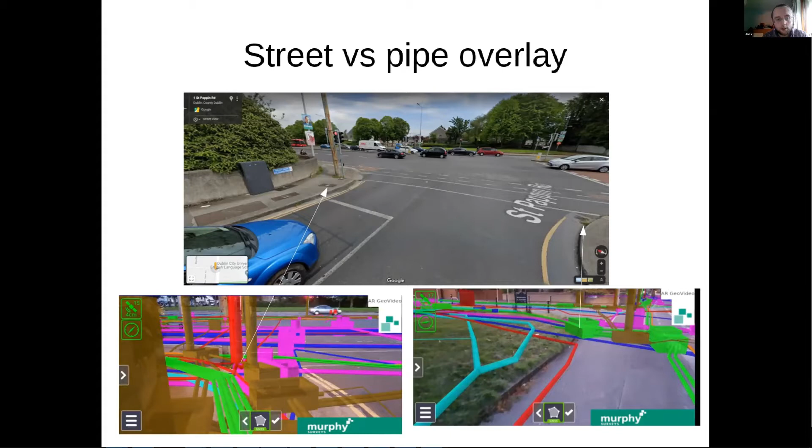So as we can see here, the street is on top, but actually the underground utilities themselves are very densely packed into both footpaths and running along the road. So the solution is to have an augmented reality video display side by side with a map.

GPS points on a map correspond to intervals in the video, and clicking a point on the map displays the appropriate section of the video.

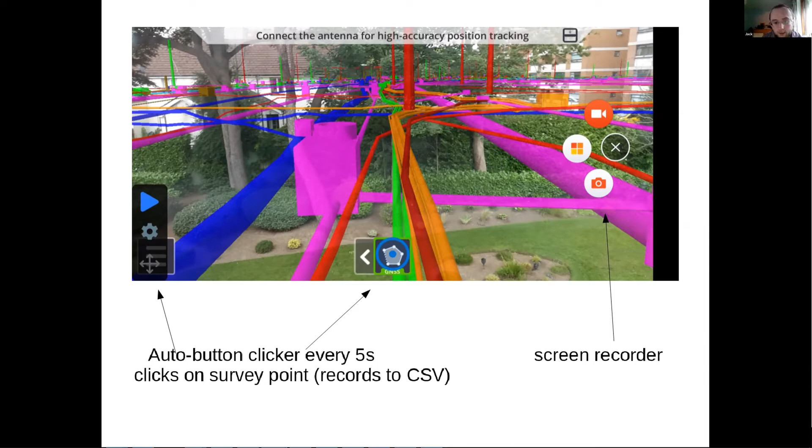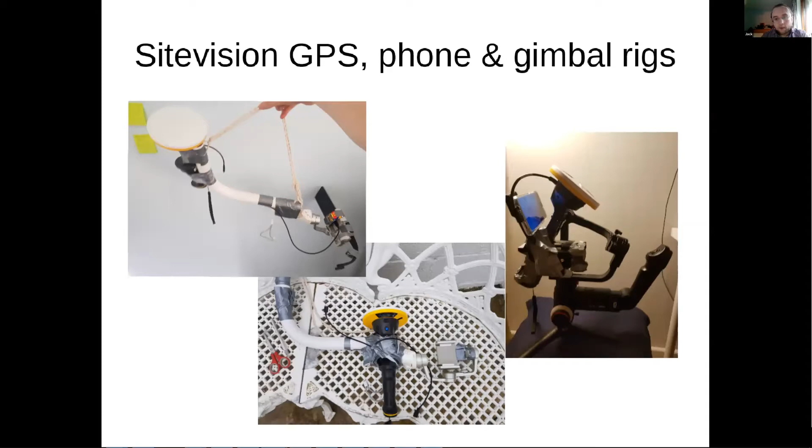This was done with the Trimble Sitevision taped into a massive camera industry gimbal, a screen recorder on the phone, and also an auto-clicker app that would automatically take a survey point every 5 seconds. We went through a couple of iterations of filming rigs, gradually eventually going with the massive gimbal for the third iteration.

There's a live video page as well, which I'll show at the end. As we can see, on the left is the map with the surveyed points, and on the right, the appropriate section of the video.

So what was achieved over the course of the last 2 weeks - the MVP, I guess you'd call it, is done. Everything from the surveying rig to the actual map and video with the appropriate correlation between the two. What is still to be done is to upgrade to a 360 panoramic video.

Unfortunately that night it was too dark to film the 360 video by the time the regular filming was done, and also just an animated marker is needed. And of course, to make it presentable to the client, it needs a lot of styling on the page as well.

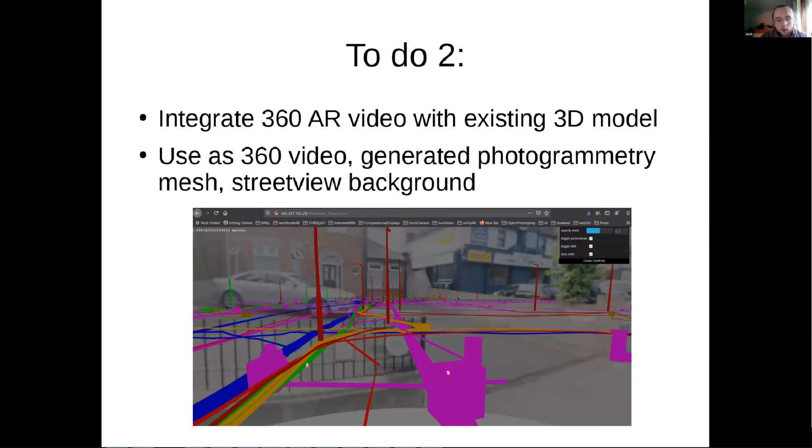With the upgrade to a 360 AR video, we would also be able to integrate with an existing portal page where the 360 can be viewed as a video, as shown previously, but also more like a street view backdrop to a BIM model.

Yeah, so fairly basic in terms of code. The only manual part was the CSV of surveyed points, which was cleaned up manually before being brought into the map, but obviously that's a simple enough CSV file reader.

So the second project, which was started in the last few days, was to align and show a monitoring site camera in Autodesk Forge. This project was originally discussed with the team at Evercam at the last AEC Hive Hackathon in Dublin, but I was not able to attend the actual hacking day at it. So this idea was just left to the wayside until a few days ago.

So the problem is that project managers and others might like to view the construction progress as a live view or time lapse directly against a BIM model. The actual alignment of a camera to the model is, as far as I know, usually a manual process and often done by surveying the camera on site.

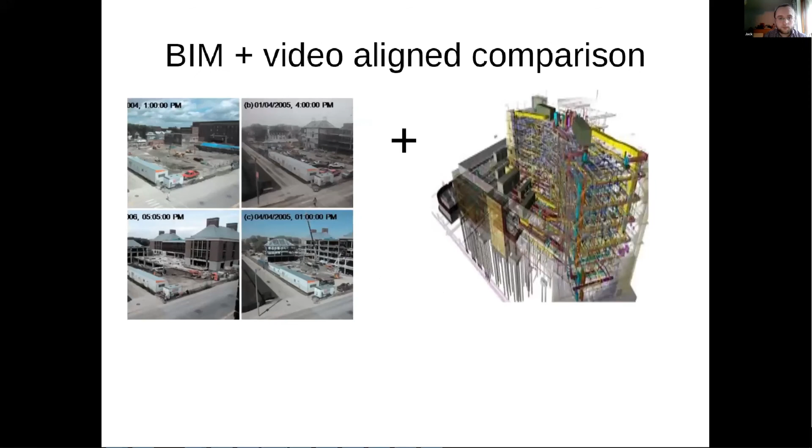Okay, so step one was the OpenCV calibration. This is a standard script, essentially taking photos of a checkerboard of known scale to find the focal length and the distortion of the camera.

Secondly, a small web page to pick 4 points from a screen grab of the actual site monitoring video. And again, another small modification to the basic web viewer to pick 4 corresponding points on the BIM model.

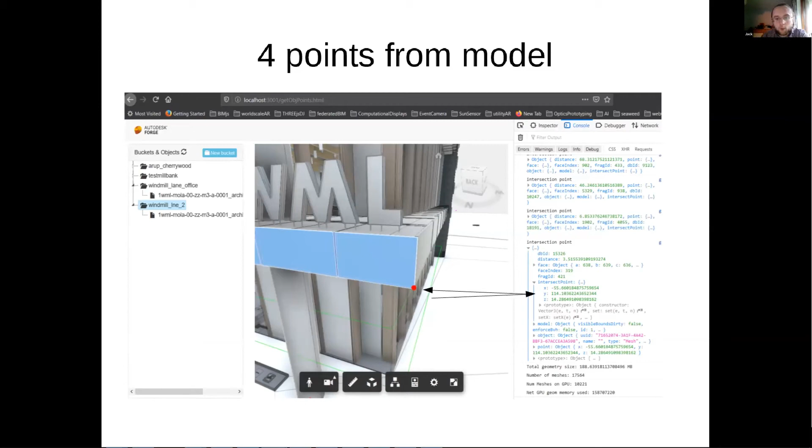As you can see on the right there in the console log are the intersection points. These points are fed into the solve PNP algorithm in OpenCV, and the output of that algorithm is the camera position and rotation.

So then afterwards is the job of creating, setting the camera view in Forge of the virtual camera to those parameters, and then creating the transparent background and underlay and overlay canvases of the actual video view so that they line up.

And there's some of my code. So this is the original screen grab and the actual placement. It seems that the camera was solved correctly, but that I'm missing some kind of correct styling in Autodesk Forge to actually get the right aspect ratio so that it truly lines up. So it's a styling problem as opposed to a technical one.

Again, I have the slider with the video and underlay and overlay working separately, but they are actually broken on that page, or at least stuck because of the styling. And again, this is an example where it's actually working.

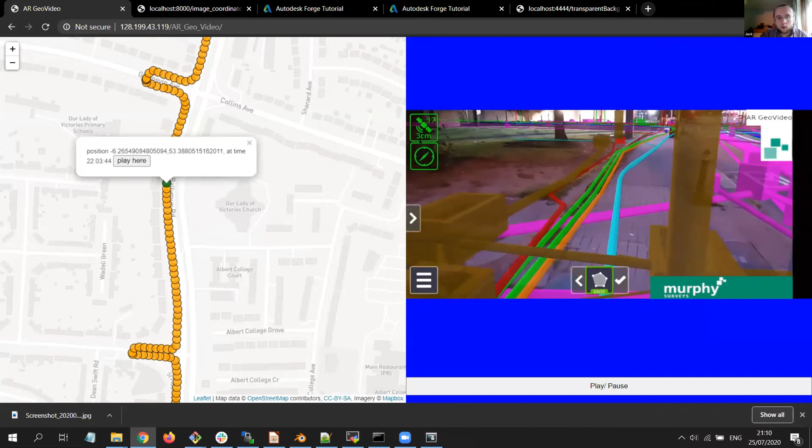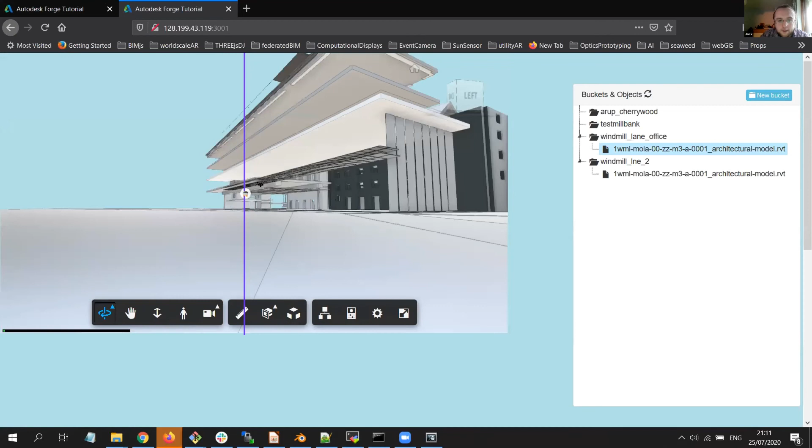Here's an example of the underlay and overlay slider working correctly. And if you go onto the test site, okay, here we go. It has the transparent background here. It's loaded up, a reasonable guess as to the proper angle.

Within the company, we've created a number of videos from drone perspective, overlaying CGI content, from a top-down or oblique perspective. But what we wanted to nail down here was a really quick one-shot process to create both the augmented reality video and also to have the GPS with timestamps on a map for later integration into a web portal system, which at the moment only facilitates 2D data. So it's more about the process by which we do this.